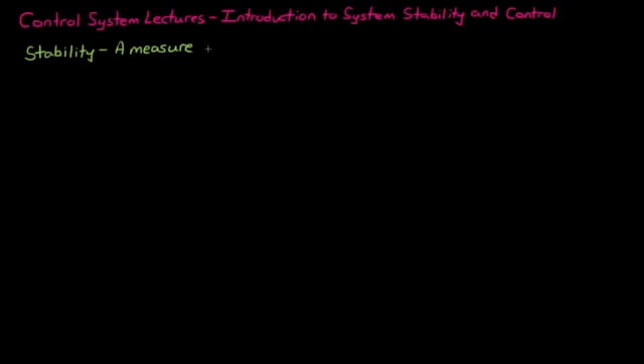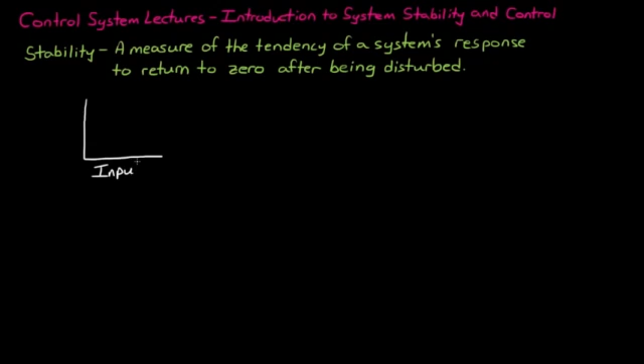Stability is a measure of the tendency of a system's response to return to zero after being disturbed. If a system is exposed to an impulse function—for example, you hit it with a hammer—and the system response equals zero as time approaches infinity, then this is a system that is considered stable. If instead the response blows up to infinity, then the system is unstable.

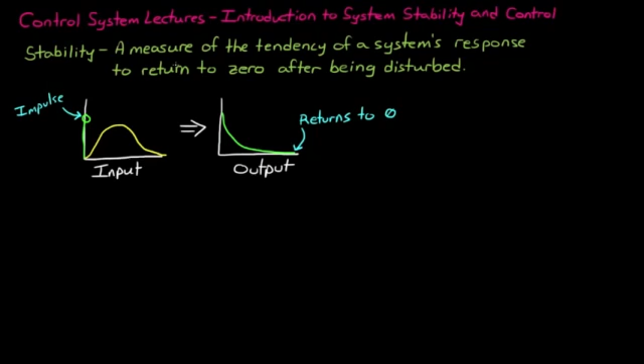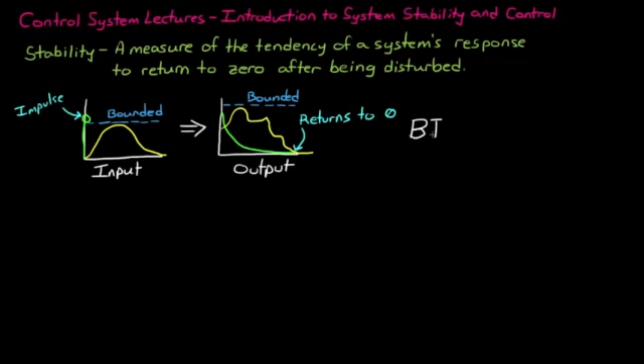Another way you might see this explained is that for a stable system, a bounded input produces a bounded output, or BIBO stability—bounded input, bounded output—which means that the only way to get an infinite output is to put in an infinite input.

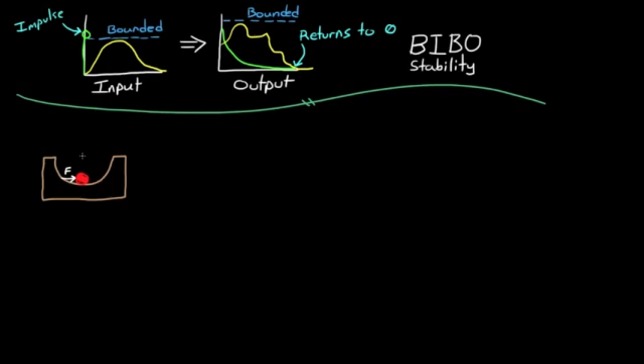I think the easiest way to grasp this concept is with a classic example. Take a system that consists of a small ball that sits at the bottom of a valley. The ball is initially at rest at the equilibrium point at the bottom of the valley. If the ball is disturbed, say with a force that pushes it away from its equilibrium point, then the ball will start to oscillate, and if there's friction, eventually come to rest back at the equilibrium point. This is a stable system.

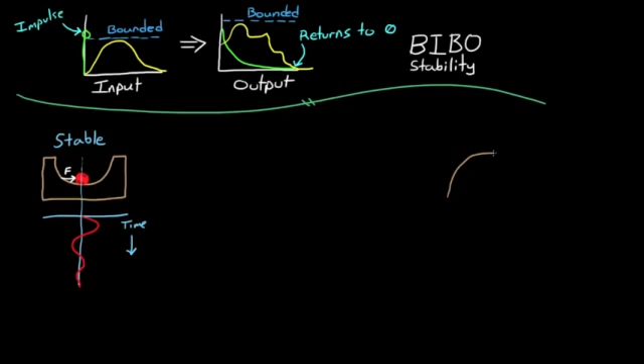However, if you were to take the ball and place it on top of a mountain and perform the same experiment, you'll see that this is an unstable system. The ball is initially at rest at the equilibrium point at the top of the mountain. However, once it's disturbed from this point, it will roll down the hill away from the equilibrium. This is very much similar to balancing something on its end, like an egg. It can be done, but since it's unstable, it is susceptible to disturbances and will fall over.

As you can imagine, there is some delineation between having a system that is stable and one that is unstable. In the case of the ball, we can visualize this as a flat table that goes on for infinity—halfway between these two different scenarios.

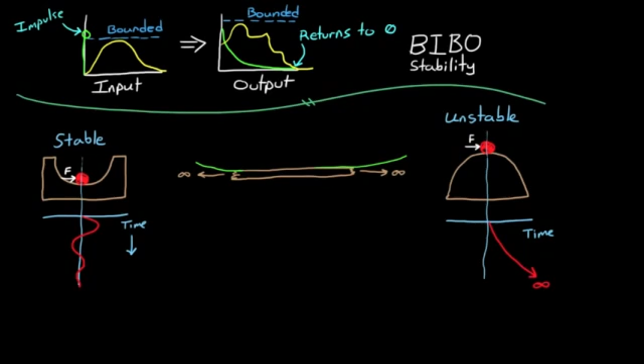We can see that if the table slopes up ever so slightly on each side, then the ball will eventually come back to rest at the starting point after it's been disturbed. This is a stable system.

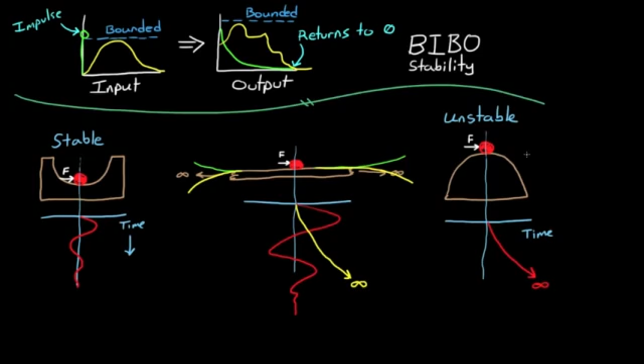If the table ever so slightly slopes down, then when the ball is disturbed, it will continue off into infinity, and this is an unstable system. We'll get back to this idea of a point between stable and unstable systems later on in this video.

For now, let's take a second example which I think is a little bit more practical than just a ball sitting at the bottom of a valley. I want to show you why there's an inherent stability in the shape of a dart. A traditional dart has a lot of mass at the tip, which skews the center of gravity towards the front of the dart. And it also has flights on the back end of the dart. These are just like feathers on an arrow, and this skews the center of pressure towards the aft end.

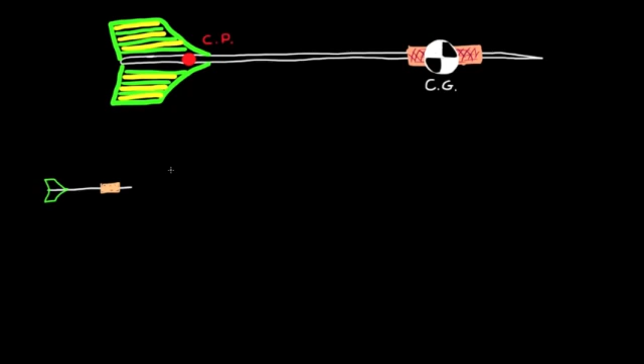If we look at this dart in equilibrium during flight—that is, when it's flying straight and level through the air—there are no aerodynamic forces perpendicular to the dart shaft. You can visualize this easier by looking at the dart head on. You can see that both the dart's shaft and the flights on the aft end are both aligned with the air and don't produce any torque about the center of gravity.

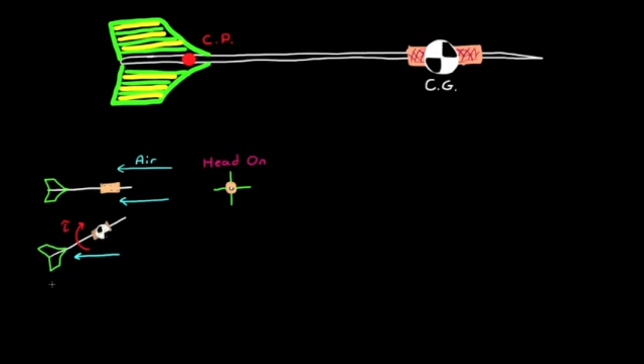But what if the dart is disturbed off its equilibrium flight path? This can be either from an initial rotation given by the thrower or from wind gusts as it flies through the air. Then the dart would be in a position relative to its flight path that looks something a bit like this. In this case, the air pressure acting on the flights will generate a restoring torque about the center of gravity in the direction that causes the back end of the dart to line back up with the air currents.

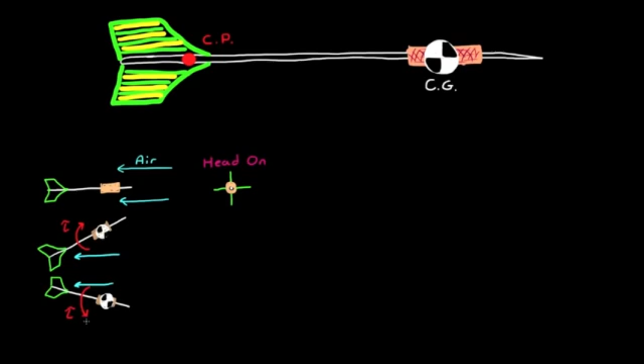The dart will oscillate back and forth about this equilibrium point until the oscillations are damped from the loss of energy through friction. This is similar to a weather vane that rotates back and forth to align itself with the wind. This system is stable because the torque generated by the air pressure tends to rotate the dart back to its starting equilibrium point.

Alternatively, we can make the dart unstable by moving the center of gravity further towards the back of the dart and moving the center of pressure forward to the front of the dart. This can be demonstrated by trying to throw a dart backwards. This causes an unstable situation because it puts the center of pressure in front of the center of gravity, which I'll show graphically here shortly.

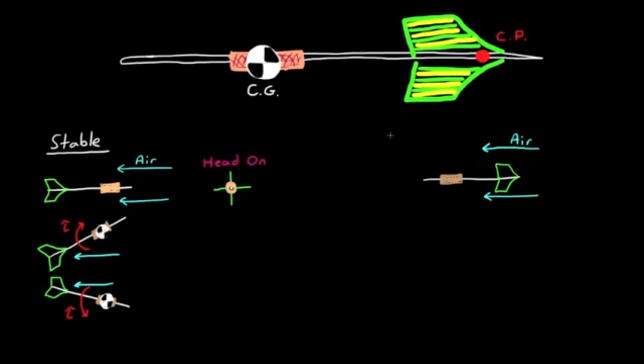The dart, though, still has an equilibrium point, and that's when the velocity vector is parallel to the dart. You can still see this from the head-on view that shows the flights are still lined up with the air currents.

The difference comes when the dart is disturbed off its equilibrium point. Now the air pressure on the flights tends to generate a diverging torque about the center of gravity, which causes the front end of the dart to flip away from its starting equilibrium position. That's why attempting to throw a dart backwards causes it to flip around in the air.

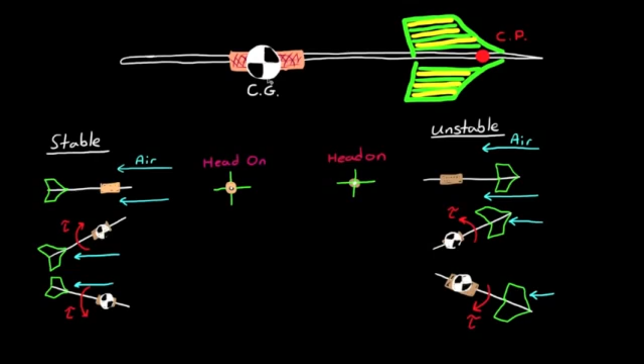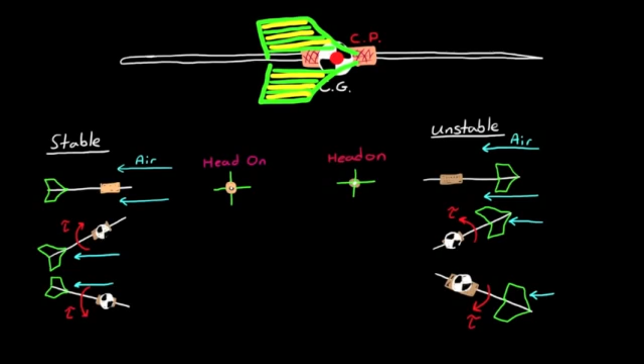But just like with the ball lying on a flat table, there is a point where you could place the flights that would delineate between a stable system and an unstable system. For a dart, this is when the center of pressure and the center of gravity coincide. In this case, no aerodynamic torque is generated, regardless of the orientation of the dart relative to its flight path.

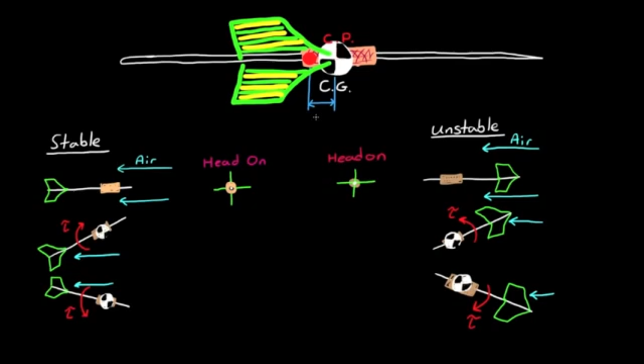Practically speaking, though, if we move the flights so that the center of pressure is ever so slightly aft of the center of gravity, then the dart will be stable. The reason is because this will still generate a restoring torque, although very small.

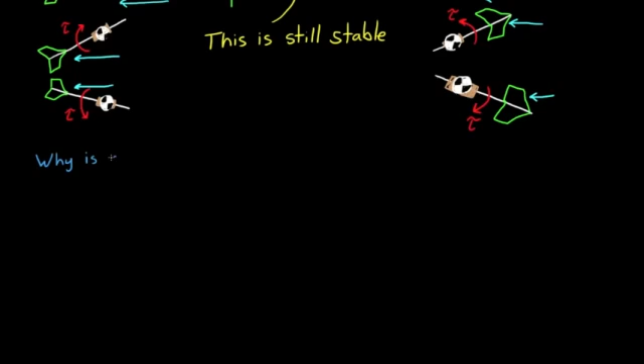But this brings up an interesting question: how stable is stable enough? As an engineer, you aren't just concerned with building a stable system. You also want to ensure that the system has enough stability margin to be able to handle small parameter changes in the system's transfer function.

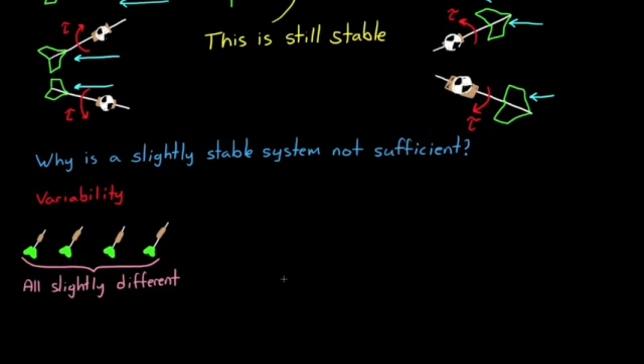These small changes might come about for a variety of reasons, and I'll use this dart example to illustrate two of them. When manufacturing darts, you might not be able to reproduce each one with the exact same center of gravity or center of pressure. Therefore, there's going to be some uncertainty in where those parameters exist on any given dart.

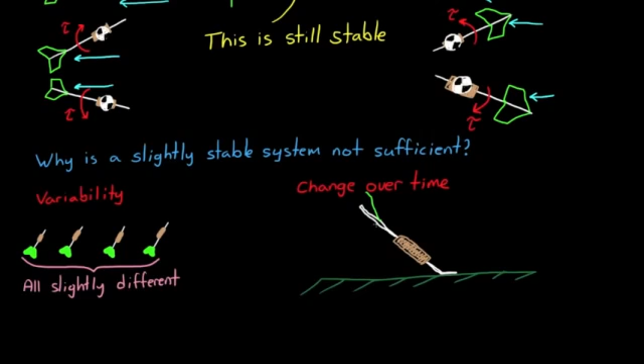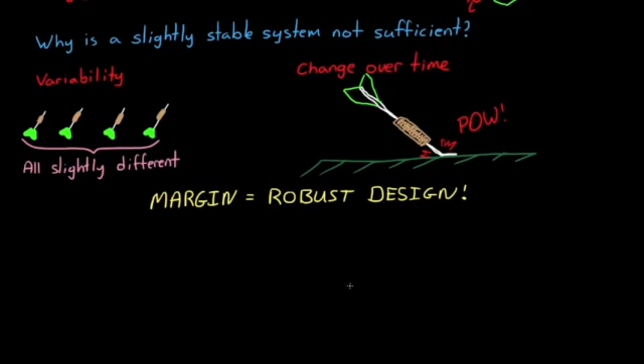Also, the characteristics of the dart could change over time. For example, dropping the dart could bend the flights, which will change the center of pressure, or chip off part of the mass, causing the center of gravity to change. In order to have a robust system that can handle variations in these parameters, you have to add margin to your design.

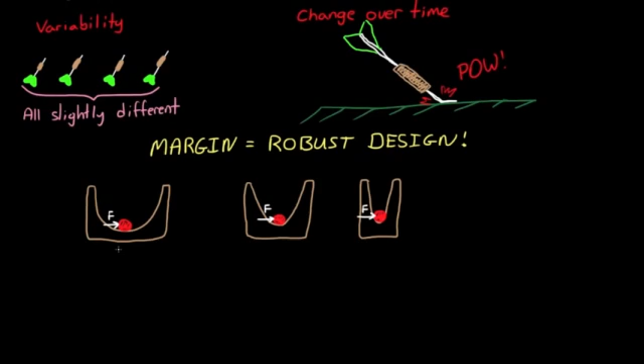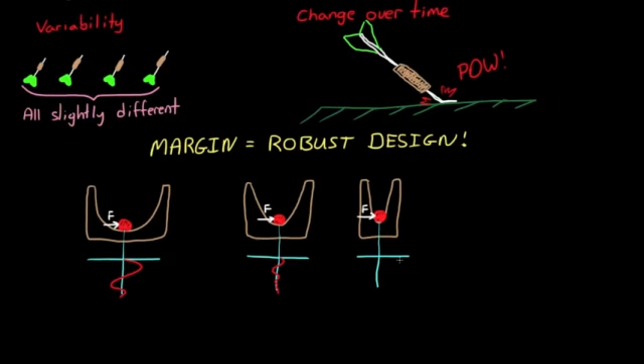But there's another reason: adding stability to your design also decreases the impact that disturbances have on the system. We can see this with the ball example here. By increasing the steepness of the valley, or adding stability, the same disturbance force will result in a smaller magnitude of the oscillations. So you can imagine that if you flicked each of these three balls in these three different cases, they might have responses that look similar to these.

So now you might be thinking, well, why not design the system to have huge stability margins? If a little stability is good, then a lot of stability might be great. Well, this might not be a good solution either.

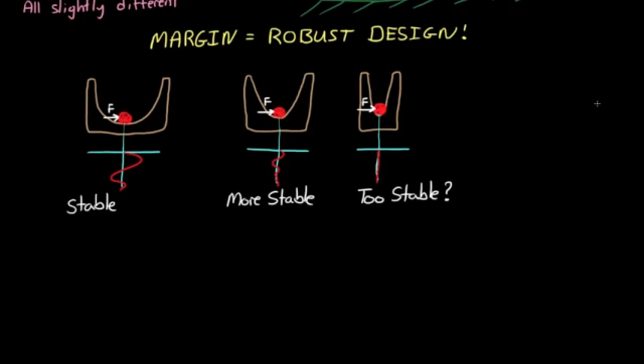The reason is that just like a stable system won't respond much to disturbances, it's also not going to respond much to actual commands either. For example, a very stable airplane seems like a good idea. However, the more stable an airplane is, the slower it will respond to pilot commands, because it won't want to move away from its equilibrium point.

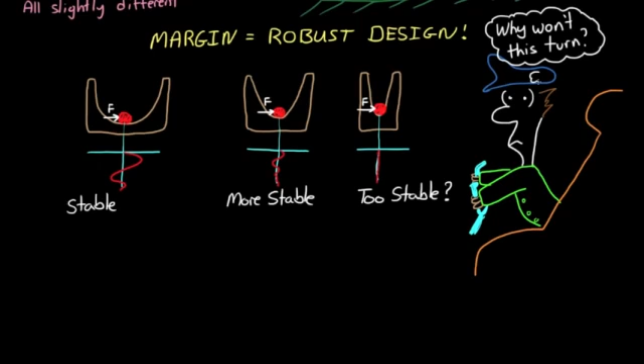So far, what we've looked at here are open-loop responses of a system - the response of a system due to its inherent passive design. An open-loop system can be inherently stable, like a ball inside a valley. But what happens if the inherent design is unstable, like a ball sitting on top of a mountain? The system can be made stable by active control means, and this is one of the jobs of a control engineer. If you were given this unstable open-loop system, you can make it stable by adding feedback control.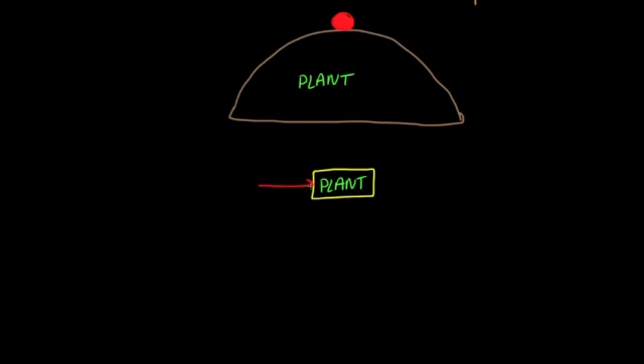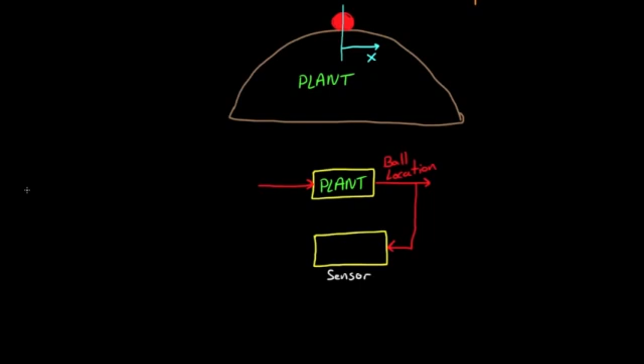I'll start by drawing a block diagram for a typical control system. The plant consists of the ball and the mountain, and the output of the plant is the horizontal position of the ball. I want to measure the position of the ball with a sensor and then feed back that measured position. My reference position is 0 since I want the ball to stay right at the top of the mountain. I can generate an error term which is fed into a controller, and the controller creates commands that are fed into some actuator that affects the ball's position.

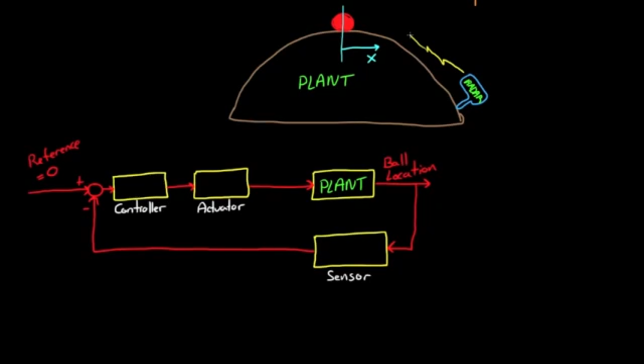So let's go ahead and populate this. To measure the position of the ball, I think I'd use a radar gun that would bounce a signal off the ball and measure the time it takes to return. I'll need one of these on each side since the ball can roll down either side of the mountain. And I can write the transfer function for the radar gun in my block diagram.

Now for the actuator, maybe I could use variable speed fans, one on either side, that I can control the amount of wind each one produces, which I can use to generate a force on the ball to blow it back up the hill. And I'll put the transfer function for the fan in the spot for the actuator.

Now for the controller, I could just use a computer, and it would take inputs from the radar gun and then feed the error term through a PID controller that'll generate commands to go to the fan. Don't worry too much about PID controllers - we'll talk about those in a future lecture.

So now when the ball is disturbed, it'll start to roll down one of the sides of the mountain. The radar guns will measure the motion, and through the controller, activate the fans to resist and reverse the motion of the ball. If I designed this control loop correctly, not only will this system be stable, but it'll have enough stability margin to account for any variations in the system and to reject unwanted disturbances, but it won't be so stable that the ball can't move at all.

Now this is just one solution of many different designs that can accomplish this very same thing, and I'll admit that this one's fairly silly and probably a bit impractical. But that's one of the great things about being a control systems engineer - you aren't forced to stay with the same design for every single problem. In fact, you can tackle the same problem in different ways as sensors, actuators, and materials change over time. For example, instead of a fan, we could have used springs attached to the ball that will impart a force back up the mountain. And instead of a radar gun, maybe there are pressure sensors in the mountain itself that can tell where the ball is.